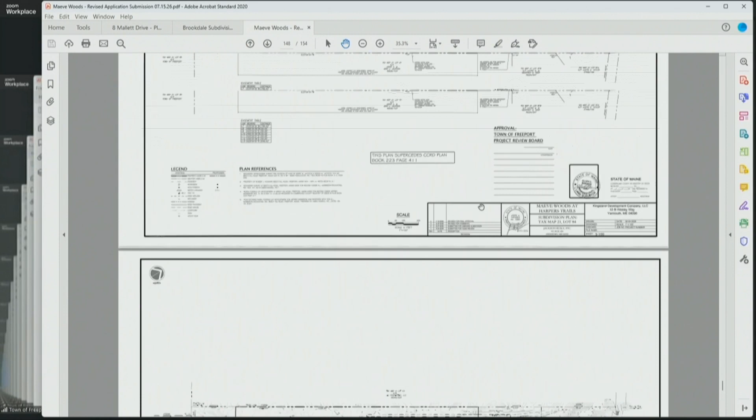Let's go to the actual subdivision plan here. For some quick frame of reference, there are 2 existing single-family home lots currently on Harper's Trail, and after those 2 lots you would start the proposed subdivision with the road being extended.

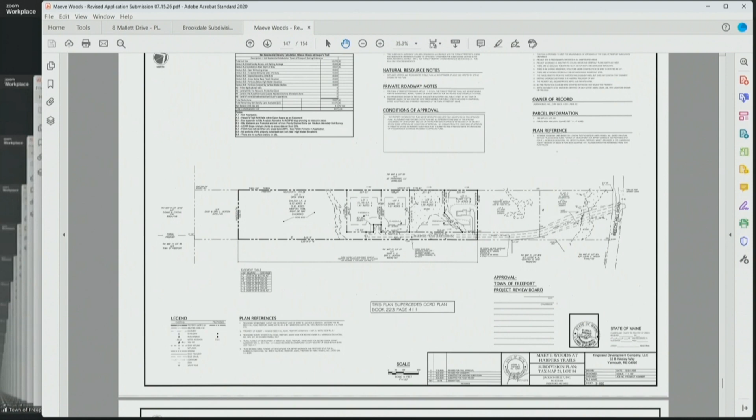The applicant had a lot of the submission requirements in last time, but there were a few things left. There were some notes that staff had comments on, things that needed to be amended and cleaned up on the recording plan. This is the modified recording plan that I sent out to the board earlier today, with all the cleanup we had been looking for. It's got the surveyor stamp now, and a couple of the notes have been corrected based on those comments. So we're looking good in terms of this plan.

The other large area that was left incomplete last month was the conversation around stormwater management. The applicant submitted a revised stormwater plan, which was also in the revision I sent out to the board earlier and posted. Previously - I'll let Jason talk through it a little more - but there's now more in-depth stormwater management on each lot, going from an infiltration strategy to a detention strategy with some bigger swale areas called out on each of the 4 lots.

One of the big comments we had last time was that the proposed stormwater management didn't capture anything from the road, the extended portion of the road, and now it does. In the stormwater management report, the applicant has shown that the post-development condition will be lower peak flow rates than the pre-development condition.

So I sent this over to our peer review engineer. They've taken an initial look at it. They haven't gotten their official comments over yet, but I had a call with them earlier today, and they seem to think that, in general, the overall concept and direction looked pretty good.

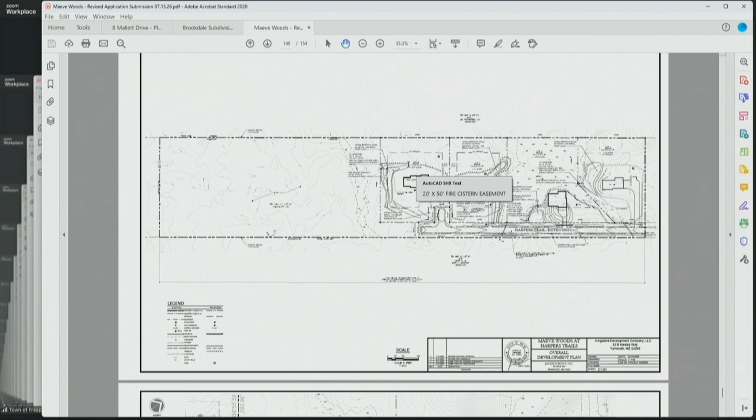And you had a placeholder for that? Yeah, so I've actually written the condition in there now. I think it's for F. On the original staff report, it was a placeholder. On the revised one I sent out earlier, I put the language in there. Can you make that full screen? It's feeding back. Yeah, perfect.

A couple other things, talk through some of the conditions we added since last time. Along the lines with the stormwater, one of the things we recommended clarifying through a condition and follow-up amendment would be to make sure the homeowners association bylaws clarify that the stormwater features on each of the house lots aren't going to be disturbed, and that the association has access to enter those lots to provide maintenance to the stormwater features. I know there's some general language in there now about the association maintaining stormwater management throughout the subdivision, but it's probably worth a little more targeted language there just to clarify.

There was also a conversation with the fire chief and the applicant about the idea of using the fire cistern on Lot 4, which the chief ended up being okay with. I think you just want to add in a couple of conditions of approval to make sure that's all done cleanly and how we'd like to see it.

Number 5 in the conditions talks about the applicant being responsible for filling and testing the cistern when it's initially put in. And then we would also need to have an easement agreement between the applicant and the town for the town to access the cistern down Harper's Trail with any emergency vehicles to be able to access it.

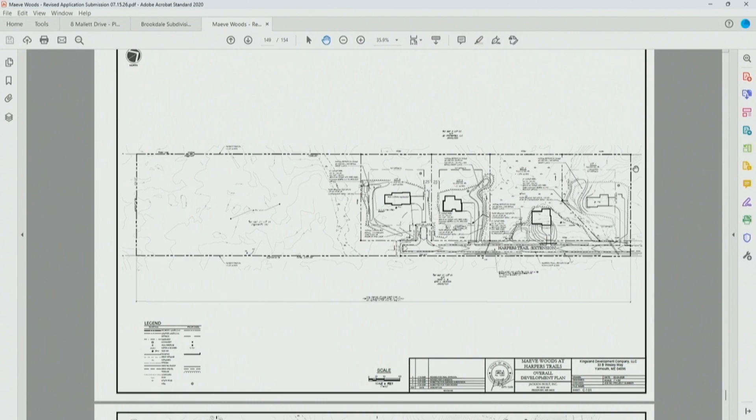So there's really no concerns left. Happy to answer any questions if the board has them, but otherwise I turn it over to the applicant for any extra info they want to give. No questions here, I guess.

Hi, Jason. How's everybody doing? Thanks. Jason Vafiatis, PE, working on behalf of Jacksonville Homes. Before I get started, I just would like to commend the town. It's been a while since we've done things in Freeport, and we work in all the towns all over the place. But never have I worked with such a friendly staff and board, and you guys should know that. You do good work, Kyle does good work. I think it's important to note that, because some towns can get a little contentious. I live in Freeport, so I'm proud to say that you guys are doing a good job. Thanks a lot. Not trying to butter anyone up, but it just needs to be noted.

So Kyle basically gave the full rundown. Just some explanation as to why the stormwater took a little while. As we saw at the site walk, the bones of the road were sort of already there, and because of such low elevation change across the site, it was really kind of hard to figure out how we can get something detained and still outlet it without impacting the wetlands. We had some grade change out deep in the wetlands, but we didn't really want to disturb any of that. So after a lot of thinking, we came up with a plan.

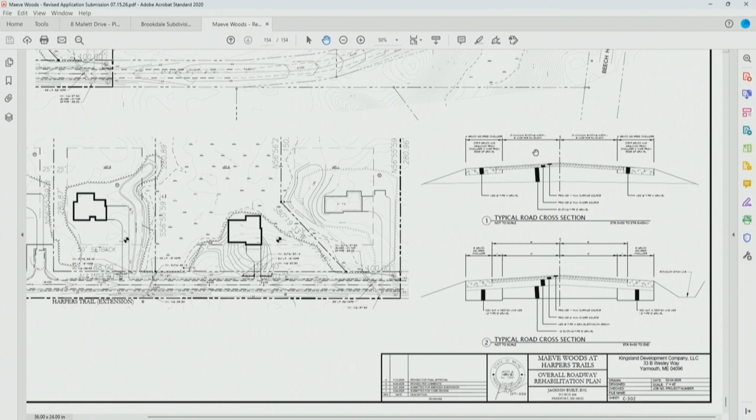So just to wrap it up, I think what we're saying is the RMA you discussed isn't part of our responsibility, but might be something you want to make sure you've got covered. Yes, thank you.

Just to add to that, the 3% within about 75 feet of an intersection, it's not like we're at 10%, we're at like 3.1. So it's not a huge safety concern here, if that makes you feel any better. Yeah, that's a good way to characterize it.

It should be stated that the engineer recommended the applicant ask for a waiver, not that they completely redo that portion because there was an incredible issue or adverse impact there. I think our peer review engineer was okay with the way it was. It was more of a procedural thing about whether it needed a waiver, or it just doesn't fall under the necessary approval of this project.

If there's nothing else from the board, I suggest we reopen the public hearing. That doesn't take a vote because we didn't vote to close it. But for members of the public, the background of this project is that this is the third appearance they've had here. They had a concept review, a preliminary review, and at the meeting last month we also had a public hearing. Because there were open issues back then and a site visit, we did not close out that public hearing, and continued it for tonight. So we'll reopen it. If any members of the public have questions or comments about this agenda item, please come up to the lectern, give your name, and make your comment.

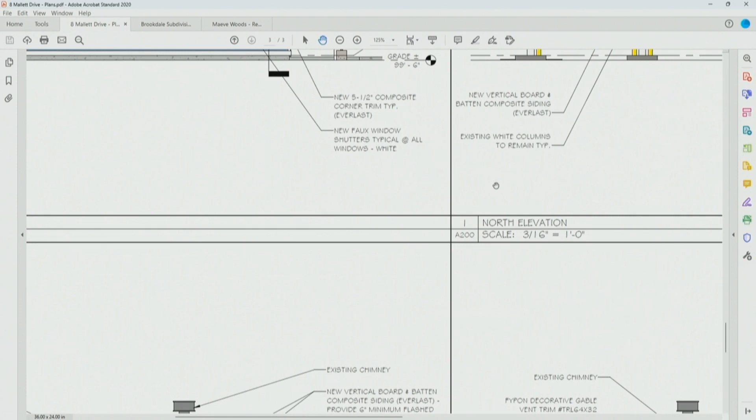The lap siding on the lower half of the building, as you can see, will be replaced with new composite lap siding. The existing lap siding on the upper half of the building will be replaced with vertical composite board and batten siding. Board and batten siding will also be installed on the existing chimney stack and around the main entrance of the building where it faces Mallett Drive.

Horizontal lap siding is prevalent throughout the immediate neighborhood and through much of design review. While there are no other immediate examples of board and batten siding in the neighborhood surrounding the bank building, there are other examples in the design review district, and several other non-horizontal siding variations can be found on nearby buildings, including diagonal board siding and vertical paneling around entryways.

The applicant is also proposing to install new composite faux shutters on the windows along Mallett Drive, as you can see from the rendering. Photos of the existing condition of the bank were included in the application packet, along with this set of plans detailing the locations of each of the proposed new materials. No changes are proposed to existing doors, windows, roofing, the building footprint, or the building height. The applicant is also not proposing any new exterior lighting or signage as part of this project.

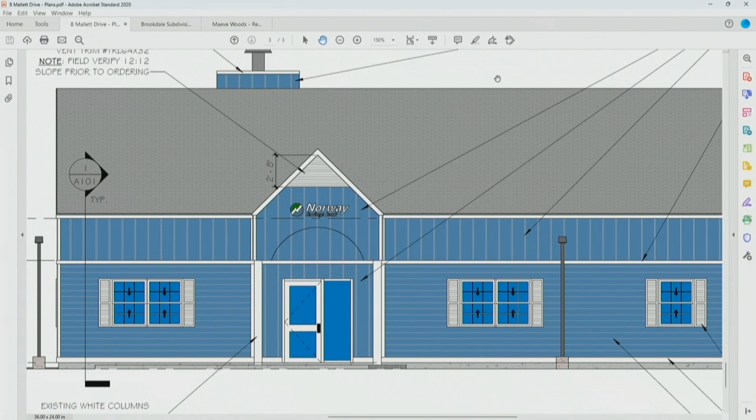Good evening, my name is Bill McLaughlin. I'm filling in for Travis Nadeau, the architect on the project. I'm an architect in training under Travis Nadeau at Platz Associates, and I'm here to answer any questions or concerns.

I've also brought a sample of the material that's to be used on the project. This is a piece of the batten board material going on the upper half—not the color that's going on, but I wanted to show that it's a substantial product. The trim pieces, the corner pieces, and the slat siding are all essentially the same substantial type product—very durable, very low maintenance, and should hold up well over time. Thank you.

Any questions? I know it's not our domain to discuss color, but what color will all of this board and batten be? It's pretty close to the colors shown on the elevations. Blue and white? Yeah, it's a blue and white. Okay, thank you.

But I was first curious about the 7-inch exposure, which sounds a little aggressive—it scales at 6 inches on the elevation itself. I don't know if that's just something that happened, or if the true intent is 7 inches. I believe the product itself has a 7-inch option; there may be others. If that's found to be too extreme, we could look at what other options they provide.

Okay, I think that's definitely worth your investigation, but I don't think it's something we'd necessarily hold up for tonight, knowing the qualities of what you're doing are adding to the contribution of the building to its surroundings. I don't know if anyone else on the board feels similarly, but before that, I'll get to my other item.

One of the weird things about the building is that the wall is so tall and the windows are so diminutive. So I was wondering if a way to improve the proportion of the windows would be to put a head trim across the top of the windows and make that more pronounced—I think that would give them a bit more proportional advantage compared to just running this clapboard or lap siding over the top.

So you're saying instead of the vertical siding, try to give the windows a bigger profile and keep horizontal slat over the entire building? No—keep the materials as you've shown them, but at the windows, have a trim piece that goes across the width of the head and a little bit beyond to the sides, to imply there's trim on the jambs, which you wouldn't see because of the shutters.

Yeah, that's definitely something we considered when we started looking at this building—it does have, you could say, a big forehead, a lot of wall surface above the windows. Right, so that was our intent with adding the other texture of material, to give it more texture over the whole thing and break up that full height of horizontal siding, which we feel it does pretty well here.

And where the line was decided upon, it kind of springs from tying into where the arches come in from the drive-through. We're trying to keep that line as high as possible, but we felt that if it went above those arches, it would look a little disjointed with the two different materials.

So with that in mind, trying to keep that band where it is, I guess my only concern would be if we put a header on that, if it's going to be too close to that horizontal band that's splitting the two materials.

Okay, I see what you mean. Yeah, I kind of sketched it in on my digital copy, and it didn't seem like it was going to get in the way of things, but you guys are the architects, so.

Yeah, we could definitely take a look at that, and I think that's an excellent suggestion to help with the issue this building has with a lot of wall height. And I think that band could move up a little bit and give a little space there.

And then the last thing I was going to ask about is the arches. There's so much variety in the arch profiles that I was wondering if, at the entrance with the projecting roof line, the arches on the three sides might just be filled in and made into a horizontal trim around the edges with a flat soffit — clean it up and make it easier to build.

And I think the signage could be bigger, too. I think that would be an improvement. And then the other arches, obviously, kind of make sense for what they are — those are pass-throughs for vehicles.

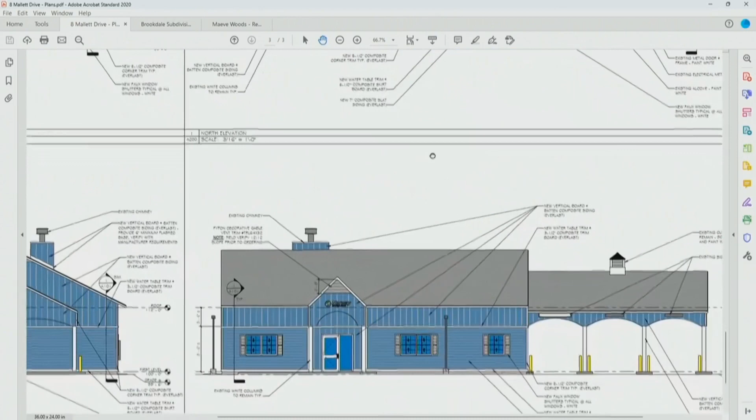Yeah, I could see that. We could definitely take a look at that. I don't know that it's a repeated feature for the bank that's a signature thing or anything like that, so we never really took a look at that, but we certainly could.

The question, just so I understand it — you're talking about the arches on the end of the building facing Main Street, or all of the arches? Just this front one here, and its equivalent. I believe you're talking about the entrance, correct? Yeah, just at the front entry, the main entry area.

Okay, I misunderstood, I thought you were talking about the drive-through. No, yeah, the drive-through works, I do see your point.

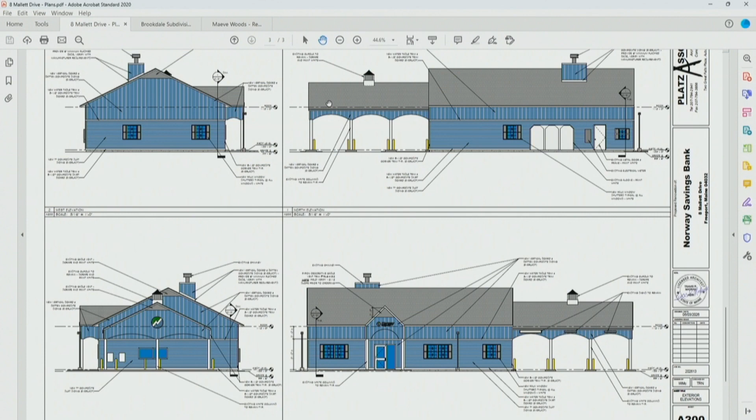It is like a completely different type of arch than the other ones. You've got ones that go high and ones that go low — it's kind of like a full half circle versus the other, more architectural arches.

Are you, Jason, suggesting that be a condition, or that they just put best efforts into it? Put best efforts. So, with that in mind, I'd say the board could maybe add a condition.

That the applicant explore some of those recommendations, and if they choose to act on one and deviate from what's shown on the plan, that's okay. Because what I don't want is for the board to approve this with a recommendation to look into something else, then they change to that and have to come back because that option wasn't approved as part of this. So yeah, I'd just add something like that.

Makes sense. Okay, thank you very much. Any other questions for the applicant? Any discussion? Would we entertain a motion?

I'll do it. Okay, you ready for a motion? Yep, go for it.

So I'm going to read what's presented as the draft motion, and add a third condition requesting that the applicant explore a larger header on the windows, a header trim on the windows, and remove the arches, replacing them with straight horizontal details on one side of the drive-through — and that it's acceptable for them to deviate from the plans as presented. Except not the drive-through, the main entrance.

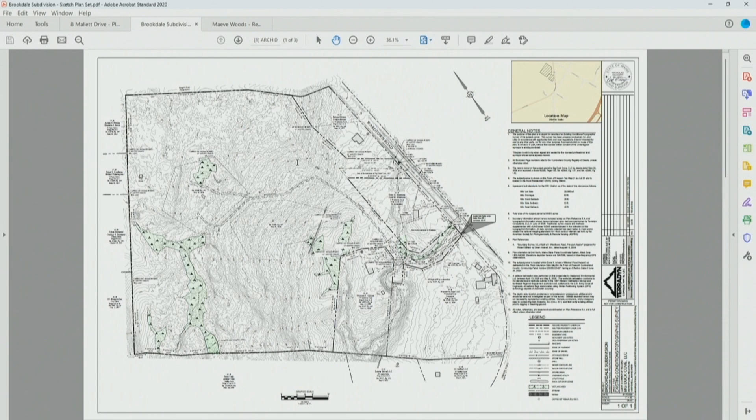In general, this will be an open space subdivision in our rural residential 1 district, similar in space and bulk requirements to the first subdivision on the agenda tonight. The density is 1 unit for every 2.5 acres of land. Your average lot size across all lots in the subdivision would have to be an acre. The open space required needs to be 50% of the net residential acreage plus any unbuildable areas.

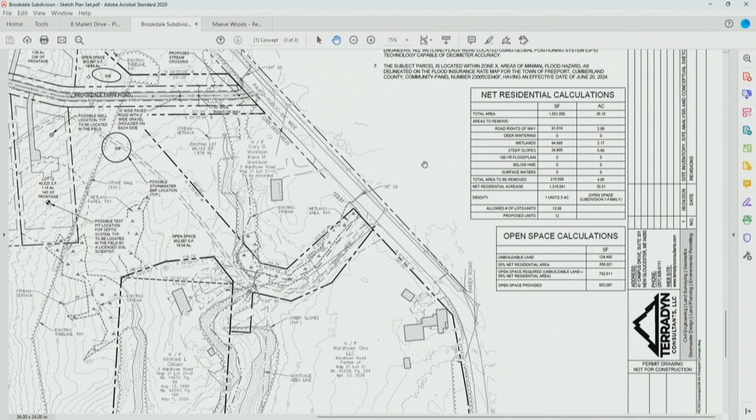So the applicant showed all of that on their plan in the application. What we're talking about tonight is the general viability of the site, and whether it can meet the base density allowances and open space requirements of the subdivision and zoning ordinance. They've gone through that exercise, and at this point there's no real concerns there.

In terms of avoiding natural resource impacts, which is something else we look at at this point, the primary wetland and vernal pool areas of greater significance are located to the south of the parcel, which isn't really being impacted by this. There are a couple of minor impacts where the cul-de-sac is and the road enters the site, but by and large, the area proposed for development is free of any of those significant natural areas.

At this point, staff didn't really have too many comments. It would be a new private dead-end road. What's shown so far in terms of widths and ending in the cul-de-sac meets preliminary ordinance requirements. Obviously we'll need to see more details as the preliminary application comes in. The applicant's highlighted some preliminary stormwater management areas on the site. We'll do further review of all that when more detail comes in at the preliminary meeting, so there's not too much comment there.

The fire chief did have one comment on this application. The concept application noted a potential water source about half a mile away. Talking with the fire chief, I don't think he felt incredibly comfortable using that as the only means of water access for the site. So the recommendation from staff would just be that the applicant connect with the fire chief and have a direct conversation to work something out ahead of the preliminary submission, rather than going back and forth with me as the middle person. It's probably easier to just have a quick conversation and work something out there and come back with whatever the result is.

But outside of that, not much to add. I'll turn it over to the applicant's rep for any additional detail, and happy to answer any questions from the board or public later. Thank you, Kyle. All right, great. Do you think you could put it on the second page to start with? Yeah, perfect.

As stated before, the project is located off Wardtown Road, map 21, lot 21. The parcel contains approximately 35.16 acres in the rural residential 1 zoning district and is within the Frost Gully Brook watershed, which is designated by Maine DEP as an urban impaired stream.

The land is mostly forested. There's some cleared meadow area closer to Wardtown Road, and there are 2 areas to access the site. As you can see, there's a northern portion and a southern portion. The northern one is where we're proposing the subdivision road when we get to the concept.

The site generally slopes from the northwest corner south and southeast. Most of it goes towards the southeast, but there is a pocket with some ridges that kind of goes to that wetland complex where the significant vernal pool is, and some of it does drain in that direction.

We had Basswood Environmental complete a wetland delineation and vernal pool survey in May 2026. They found approximately 2.17 acres of wetlands, primarily in the southern and eastern portions of the site, not in the northern portion where we're proposing most of the work.

There are streams associated with those wetland complexes, some of them intermittent, but there is a larger stream that runs north and south that crosses underneath Wardtown Road and then goes south. Again, it's at the eastern portion of the site.

There are also approximately 0.68 acres of steep slopes, identified in the orange color, mostly associated with the embankment of the stream, but there's also a little ridge area closer to the vernal pool where there's some steep slopes.

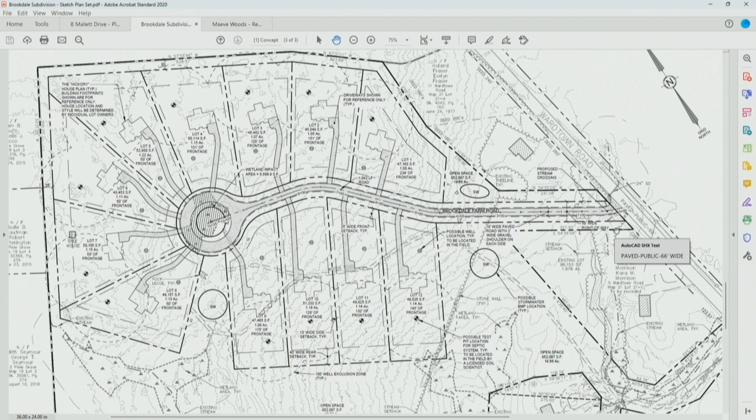There'll be two natural resource impacts, as Kyle stated. We'll have a stream crossing at the beginning, where the stream starts—there's no way of getting around that. Then there's an isolated wetland in the middle that is forested. It doesn't connect to any of the important natural resources, it's just kind of there.

The cul-de-sac is going to go right through it, so we're going to have approximately 8,900 square feet of impacts to the wetland. That will require a Natural Resource Protection Act permit as well.

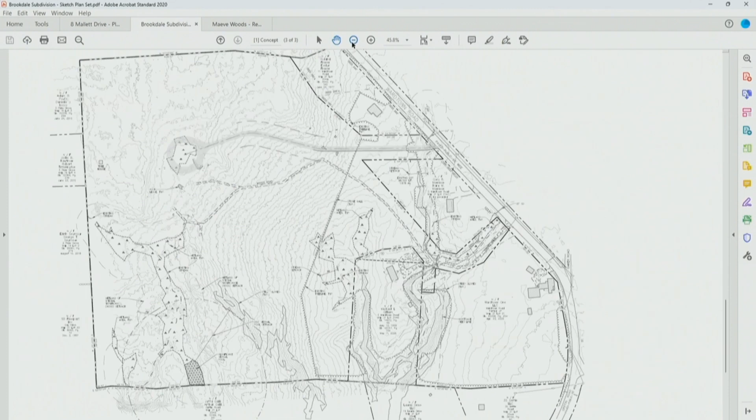The other impacts associated with the significant vernal pool, which has a 250-foot setback, and any wetlands of special significance, which are tied to the significant vernal pool, extend quite a bit further—750 feet, according to some new DEP rulings. We're not impacting those setbacks at all, so we're really trying to maintain the fact that we're not impacting those important natural resources.

Just to give the overall summary of the permits we need to get: we need a stormwater permit, as I mentioned. We'll have a permit by rule for the stream crossing. We'll have a Maine Construction General Permit, which used to be a checkbox on a stormwater permit and would just be taken care of by the contractor or separately by us. But DEP has changed how they do their process with their new online system, and now that's something that's required separately.

This has to do with erosion control and the right to start construction, so that everything's being built properly. That's always been required, but maybe some people haven't always seen it handled this way. We'll also have a NRPA Tier 1 permit due to the wetland impacts, and then a U.S. Army Corps of Engineers permit that we'll have to go through as well. So quite a bit of regulatory permits we have to go through, which is not unusual for where this is and the environmental resources and impacts we're showing.

Traffic and sight distance: the subdivision is expected to generate between 17 a.m. peak hour trips and 15 p.m. peak hour trips, so I don't expect any traffic impacts as a result of this. The area around our entrance is 40 miles an hour, which requires a 275-foot sight distance. We have 1,000 feet looking north and 750 feet looking south. I don't expect an issue with sight distance.

Finally, a homeowners association is anticipated for road maintenance, stormwater BMP maintenance, and all the shared infrastructure. That'll be in the homeowners docs, which will come later, not at this meeting. We'll provide the draft HOA, as well as how we're treating the open space, whether it's conservation or not. We're still working through that internally, but that will come in the preliminary application.

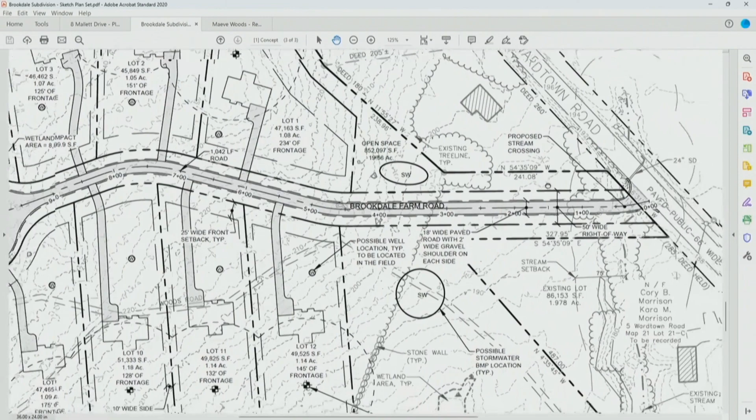Matt, when you say you have 100 feet to work with, what do you mean? So that width right there is 100 feet, property line to property line. I see, okay, so we can shift the road right-of-way to play with what the best alignment is. But that's where we wanted to show it now. That could shift.

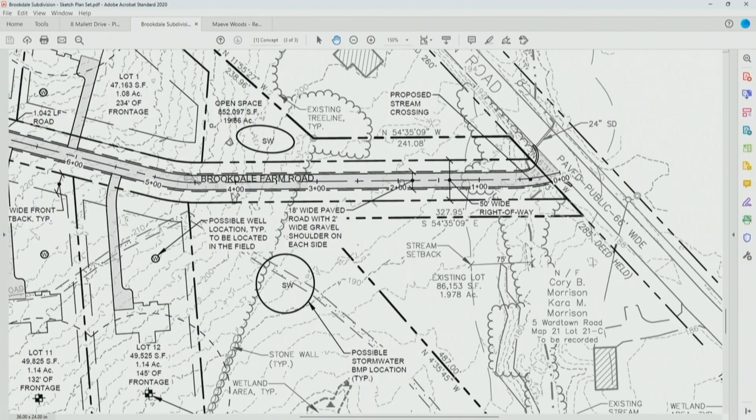Other questions? I have a question about the pool, which you suspect is a significant vernal pool. Your design anticipates that? To the bottom, yes, that is a significant vernal pool. And I thought it was a 250-foot setback, but you said something about 750? So new DEP rules, any wetlands within that 750-foot area, setback is probably not the right word, but any wetlands within 750 feet are now considered a wetland of special significance and carry a 75-foot setback.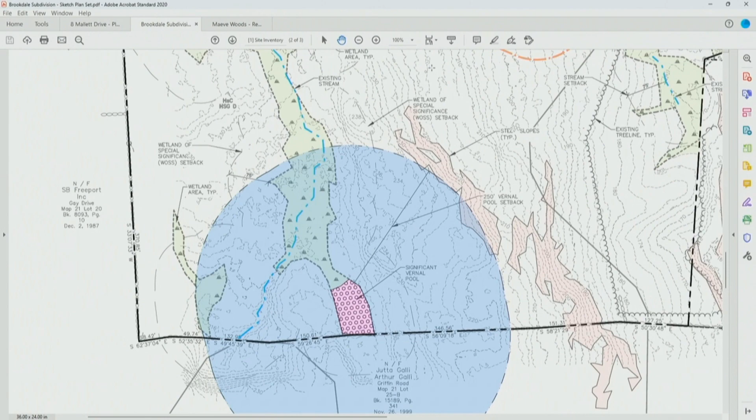250 feet is quite a bit. So under the new DEP rules, all those wetlands would be WOSSs, wetlands of special significance, and they would carry that setback. So we made sure to have our development area outside of that as well. You can often reduce that setback width with permitting, but we don't have to worry about that here. We're not even going to touch it.

One of our approval criteria is that you have to have adequate domestic water supply on each lot. You'll have a well driller go in and do a test, or how are you going to address that? Yeah, we'll make sure we have adequate water supply. We're not sure exactly when we'll do that, but we'll make sure we have adequate water supply. How do we handle that — do we make the approval, if this gets final approval, subject to them having adequate water supply, or do we require it before we approve? No, it's shown in the application.

Okay, so you bring that forward then? Yes. And when do you think you would be back with preliminary? I think we were aiming for like a September, October timeframe. We still have to get into the permitting aspect, but I think that's what we were aiming for at this time.

Okay, September is before hunting season, if that, because we probably will want to do a site walk. That's the board's decision, but we always do a site walk for major projects. And if I recall, do you do it before preliminary, or after preliminary, the site walk? It can be either, but we typically schedule it right before a meeting, like 5 o'clock before a 6 o'clock meeting. Yeah, just wear lots of orange, I guess.

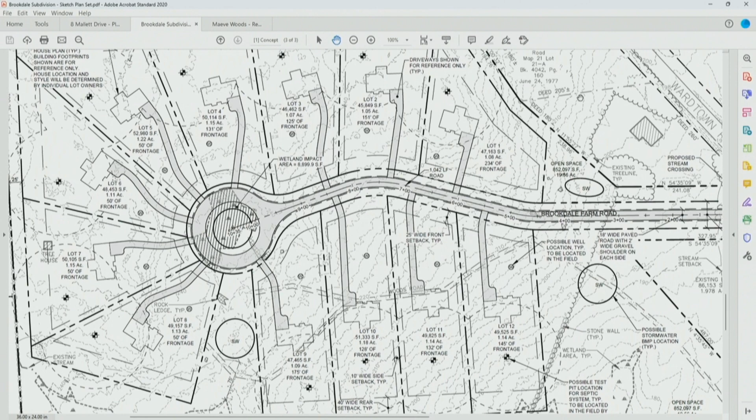Your lot sizes are very close to one another in size and consistency. You don't see that often. What's your secret trick for getting them all to be like that? Guess and check. I think it started - they were a little bit more spread out in the bottom, but once we learned about one of the abutters, we wanted to get it out of the field, it just kind of fell into place to get a consistent width. Lot 1 is probably the outlier, other than the ones around the cul-de-sac, because that's just how it works. But no, I appreciate the compliment - it seems like a remarkable feat, probably from looking at it over and over again.

Another approval criteria for us that we don't usually drill into too much is to make sure the applicant has the technical capability to execute the project. This applicant has done projects before? Yes. Is this the John Libby who is the post and beam John Libby? No. Okay, but you've done projects before? Yes, oh yeah, 100%.

I think it's the same developer at the end of Pleasant Hill Road going into Brunswick, the Village of Brunswick or whatever it's called - it's brand new, where Baribeau T-bones into Pleasant Hill. I'll take that, good, thank you. Okay, but yes, we've done quite a few projects, including the Pleasant Hill one, and I've done one off Route 1 in Freeport. So we've done quite a few.

Good, thank you. Any other questions for the applicant? Again, this is not the formal public hearing, but we invite public comment. Does anyone have any questions or comments? Come up and state your name and let us know where you live, please. Bonnie Thurber, Bonnie Fraser. My mom, Evelyn Fraser, 11 Wardtown Road.

We just had a few questions regarding water, because there's been times the well has gone dry in the past. How is that going to affect the homes in that area? Because where all those homes are, it slopes down, so the water that goes to 11 Wardtown Road, I would think, would be coming from up there. Somebody had said about making sure there was adequate water. Is that something that would be looked into?

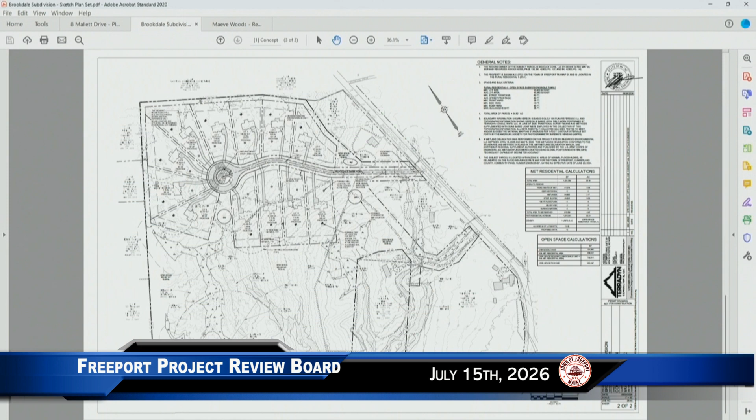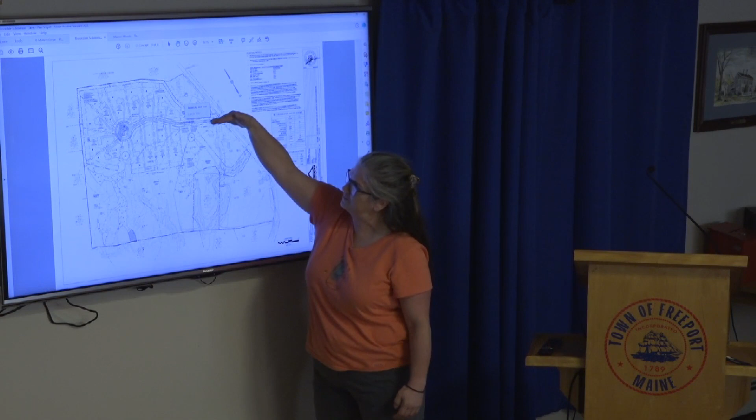When they pull up that photo they were showing, are you able to tell me where our property is? Can something be done, can a request go in? If you're putting the road right there, when people are turning at night, can something be put there to block the lighting? We were thinking maybe... Can I ask you to come to the mic?

Can you explain? It sounds like this is a lights-into-a-window situation. I was just wondering, I have other questions as well, but I was just going to ask, because that's all woods over there.

Then there's the field and whatnot. So, of course, we've been there for whatever years. There's been all those trees and stuff, so.

John Libby, applicant. Yeah, so we kind of thought about, obviously this is just a preliminary, we haven't got anything, but thinking we'd maybe do some row of buffering of trees right at the entrance there, so anybody coming from the south turning in there, it would minimize any of that as far as we could.

And then as for the house at 11 Wardtown Road, where the field is there, looking at that, how far back is that first...

The first what? Here's the house. Yep, like this open space, is that a lot of the field area right there?

Yeah, I think this area, this right here, this is the field. That kind of goes up and then kind of around. This is all trees, so your house is in the opening. And then you got tree lines here, it goes back and then down through.

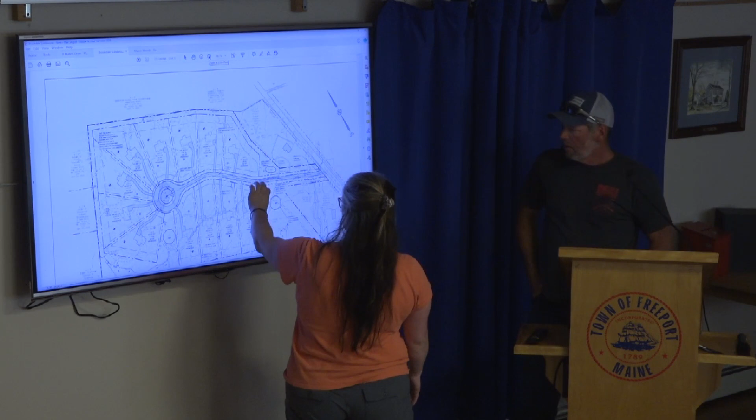So this right here, what is it? Bonnie, you got to stay near the mic, everything should go into the mic, because we're recording it. What is this part right here? Right there? Point to it. So that's going to be the entrance.

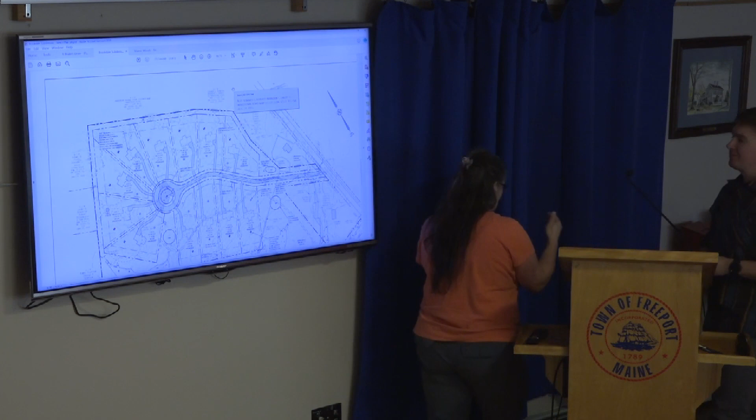And then there's a brook that runs right there, I think. I'm just trying to look to see how that works, like how far back is that? How many feet? Geez, I don't know. There'll be no home there, I guess it's irrelevant because it's your property.

So I'll just give you a quick rundown. So yeah, we do have the stream brook right here. There's a culvert that comes across here. We're providing a 25-foot buffer currently between there. Is this what you were talking about? I couldn't see what you were pointing at.

What's that right there? So that might be a potential stormwater BMP. It could be like a rain garden, which is just a little pool with plants in it. It could be something like that. There's a number of different things it could be.

But the idea is that there's going to be a 25-foot buffer that we're showing along where we have the lots, so that would be maintained trees. Hopefully it reduces any impacts you see or hear from the development. And then all...

...the wooded area here of the property, so there'd be a 25-foot buffer here? 25-foot buffer from the edge of our property line. Right, the bold line. So all our trees won't be bothered?

No, we won't be touching your trees. There's been a lot of high-profile cases of trees being cut on other people's property. That's not our intention. I mean, this is taking away like everything of my whole upbringing in Freeport.

Bonnie, one thing that might help you getting oriented on the face of the earth, we'll do a site walk. And when we're there, the applicant will have laid out the center line of the road so we know where the road is. And they'll lay out where each lot comes to the road. So you'll get a sense of where those are, and we can actually anticipate where areas will be cut for the trees.

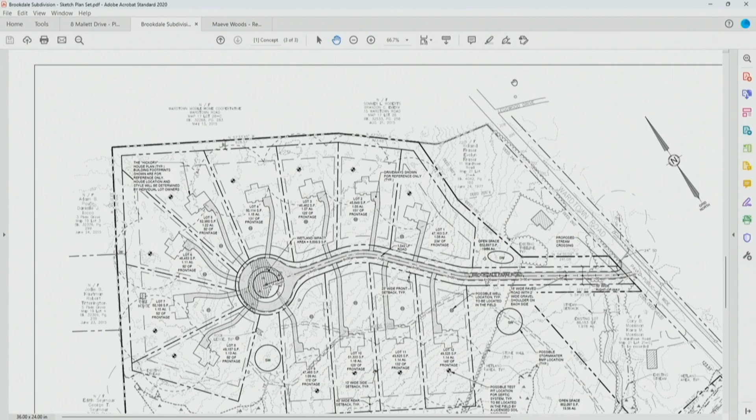We're really sensitive to the concerns of abutters when it comes to buffering, so just put that into your thinking, your planning. I'm sure they do.

I mean, it just, all the deer, everything out there is going to be gone. Everything.

I understand, people bringing in new homes and whatnot, but it's hard. Thank you very much.

Anyone online? Yeah, there's one hand online. Ethan, I'm going to allow you to talk. Give us your name and address before you ask your question, please. Hi there, can you hear me? Yep. All right, my name is Ethan Gilmet at 8 Wardtown Road.

My wife and I live here on Wardtown, and we just want to echo the concerns of 11 Wardtown, especially considering we are on a dug well, so we're a lot more susceptible to droughts than anyone on drilled wells. We're concerned about the water supply and the water table, since 12 lots is kind of a lot to add to this area.

And you're asking that precautions be taken in that regard, Ethan? Correct. We are going to be addressing this, Matt, so I think for you to be equipped to answer my question and Ethan's would be helpful at the next meeting. Okay, great, thank you, appreciate it. Anybody else from the public have any questions or comments?